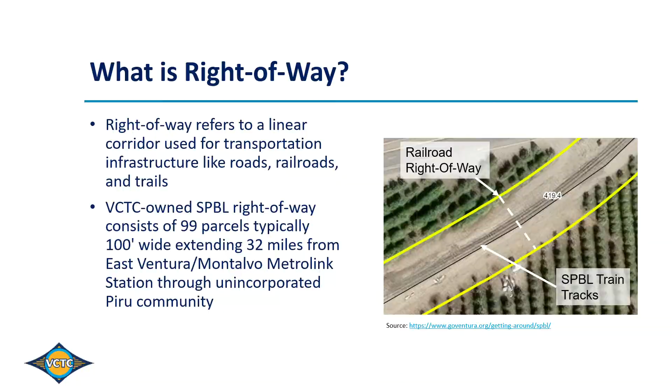In 2024, VCTC applied for and received a Surface Transportation Block Grant and also a Regional Early Action Planning Grant from the Southern California Association of Governments to update the Trail Master Plan from Saticoy to Piru. Then, following a competitive procurement process, our commission approved a contract with WSP in March of 2025 to prepare an update to the Trail Master Plan and environmental documents. I share this timeline and the details to convey that we're still on the front end of the Trail Master Plan update, with many opportunities, including this evening's presentation, to provide input into the planning process.

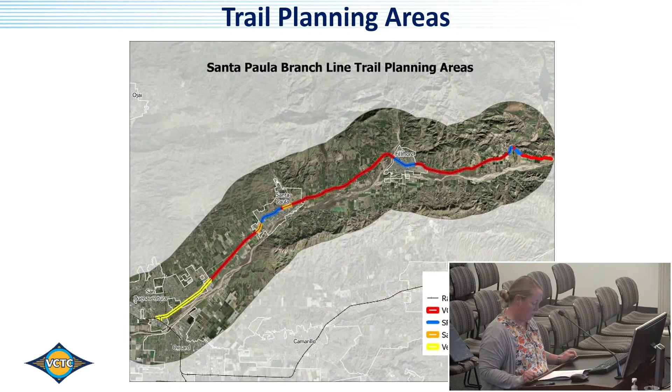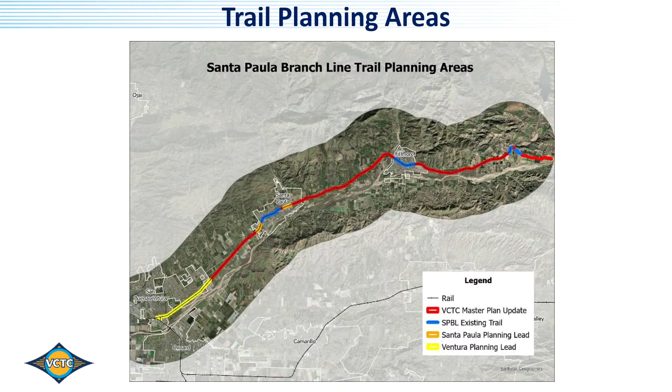This map depicts the various planning areas for the Santa Paula Branch Line corridor. The branch line begins at the East Ventura Montalvo Metrolink station and continues for approximately 32 miles through Santa Paula, Fillmore, and Piru. The existing completed trail segments are shown in blue. The area shown in yellow is the 4-mile Ventura segment, and the areas shown in orange are the Santa Paula extension segments. The red sections are the focus of the Trail Master Plan update, the approximately 27 miles from the Saticoy Depot through to the end of the corridor, which extends about 3 miles past the end of the existing railroad tracks in Piru. Areas that connect existing trail segments and the Heritage Valley communities with one another and eventually create connections to the coast.

As I mentioned, there's a 4-mile segment in Ventura that is advancing through the final design and construction through a separate effort led by the city of Ventura. So that part is not included as part of this Trail Master Plan update.

To complete the trail, we do face a number of challenges related to constraints on the right-of-way, bridges, and crossings, and addressing concerns related to compatibility with adjacent agricultural activities. As I like to say, if this project were easy, it would be done by now. At the same time, we have many opportunities to build on existing studies, connect to existing and planned trails, and to incorporate historic and educational elements into the trail design and implementation.

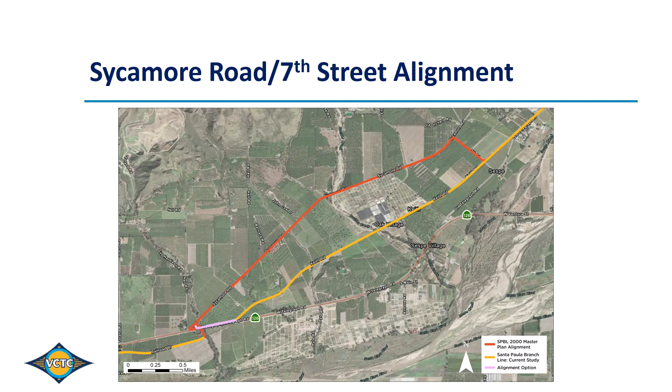We are looking at leaving the railroad right-of-way to cross the Sespe Creek and following Old Telegraph Road. We believe that there is sufficient width there to restripe and add a protected bike lane across the river on Old Telegraph Road, and then reconnect with the existing trail segment that begins there at Goodenough Road in the city of Fillmore.

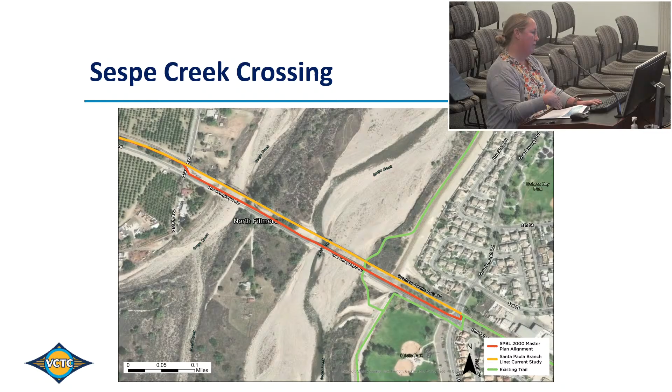That would be a significant cost savings compared to adding a new bridge within the railroad corridor, or adding a sort of cantilevered addition to the existing railroad bridge. So both the original 2000 master plan and our thinking going forward is looking at using Old Telegraph Road.

We've had some really wonderful, productive discussions with city staff to talk about some ways that we can leverage existing trails here in the city of Fillmore to both connect the trail segments across Fillmore, but also to create a really lovely trail network around the city of Fillmore by filling in a number of relatively small gaps in the existing bicycle and pedestrian infrastructure here in the city, taking advantage of a lot of the really great planning work that's already been done here in the city, and building additional segments out to create that connection across and through the city.

So those alignment options are shown in pink on this map. We are looking at a possible bridge over State Route 126 that would help connect across the railroad right-of-way. But we're also looking at some other alternatives for carrying pedestrians and bicyclists across the 126 and connecting with the city's infrastructure.

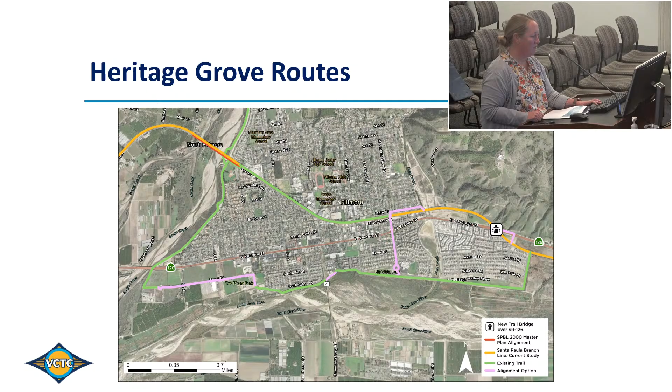So we are pursuing a programmatic environmental impact report that looks at the whole master plan, and we're really in the early stages of that environmental impact report process.

A programmatic EIR evaluates potential environmental impacts of a plan, program, or series of actions that can be characterized as one large project. It informs decision makers about the environmental impacts of an entire plan rather than one smaller project within a plan.

A programmatic EIR can accelerate environmental review of later activities by offering lead agencies the flexibility to consider alternatives and mitigation measures, to streamline approval of future projects and support implementation of capital improvements, and consider a broad policy alternative and mitigation earlier when there's more flexibility to address those concerns.

The environmental analysis process begins with a project description and public scoping, then technical studies, preparation of a draft EIR, public review and hearings, and a final EIR. We are currently at the public scoping phase.

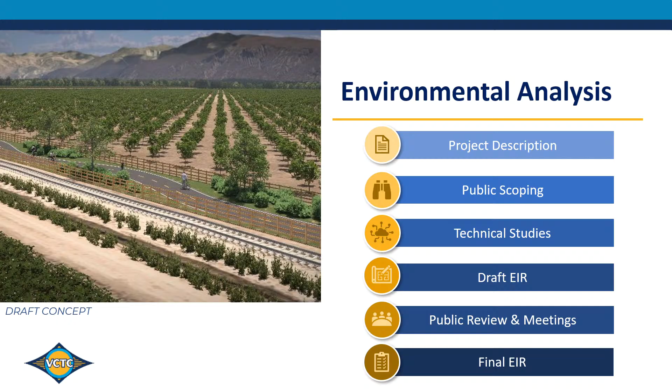A wide range of factors will be analyzed in the EIR, including agricultural, biological, and cultural resources, transportation, wildfire, and many others. So we are not limiting the scope of factors being analyzed in this EIR like some projects would. We are considering the full range of potential impacts.

The master plan update and environmental review provides many opportunities for the public to engage in the planning process. Community engagement conducted thus far includes the formation of technical and community advisory committees that are made up of a wide range of agency and stakeholder groups.

Our team has also conducted 4 pop-ups at community events, including one here in Fillmore over the summer, and more will be conducted in the coming months.

We've held one-on-one and small group listening sessions with many stakeholders, about 20 to date, and we're grateful for the time and insights provided by all of our project stakeholders who have participated thus far, and we look forward to hearing from more stakeholders throughout the process.

We've also created a number of online engagement opportunities, including an interactive pin map, a website, social media, radio, newspaper, and canvassing.

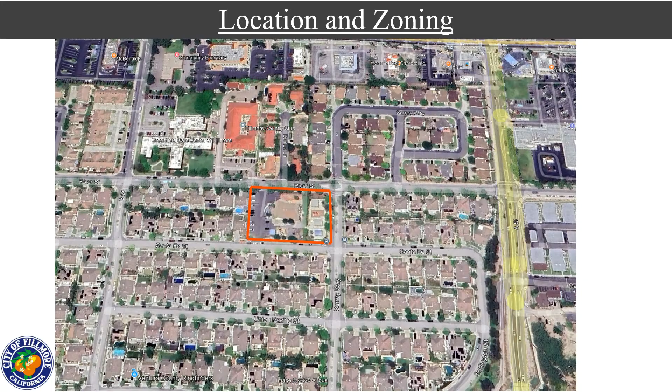The project is a remodel of an existing structure at 808 River. This is modification 2 from an existing conditional use permit for a child care facility, so it's an expansion involving development permit 1106, a conditional use permit, and a lot merger. The location is at the corner of River, Surrey, and Santa Fe to the south. The zoning is residential medium, which does allow for child care facilities. However, if you have more than 7 kids, you must get a conditional use permit, and that's what they're doing. It's an existing permit as well, so they have more than 7 already.

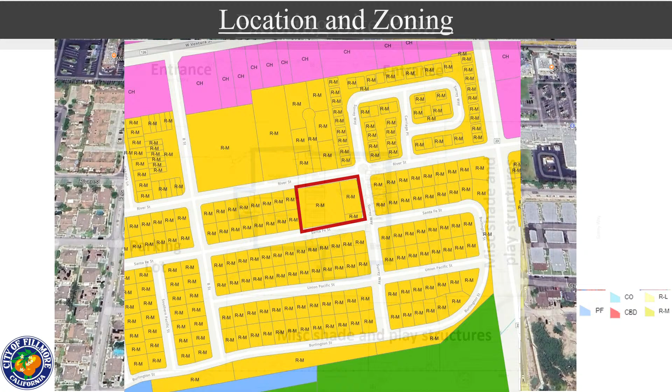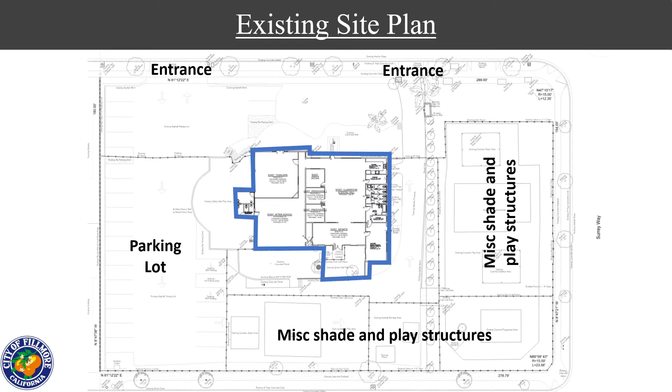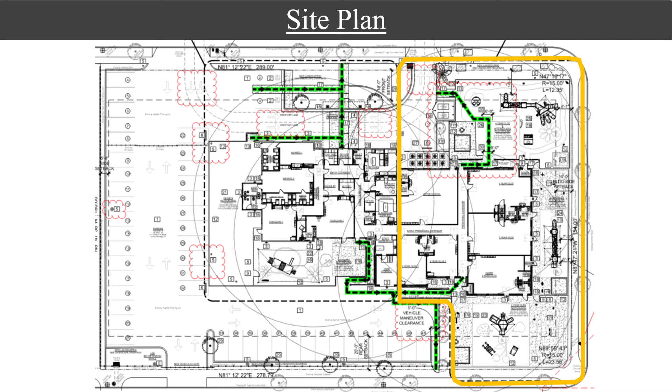This is the updated site plan. The project overall is to be done in 2 phases. Phase 1 is the expansion portion, so this is the new structures that will be added, adding over 6,300 square feet of classroom buildings, playgrounds, separate play structures, bike tracks, sandboxes, and the parking lot reconfiguration at the south entrance.

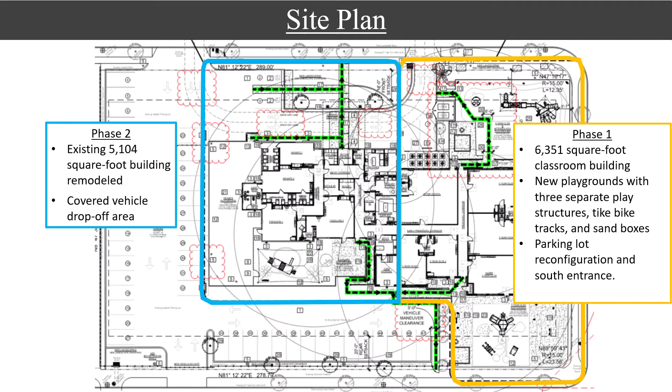Phase 2 will be the remodel of the existing facility. Once they move the kids out of the existing facility into the new one, then they can remodel the existing structure, a 5,100 square foot building, and it'll be adding a covered vehicle drop-off area. That'll be a new feature added, and that's the entrance at Santa Fe to the south.

Planning Commission's comments in October relative to landscaping asked for artificial turf in the front to be more of a natural landscape, and asked for the tree sizes that were 24-inch boxes to be increased to 48-inch boxes.

The applicant has addressed those in the front yard. They've converted the artificial grass to natural plantings, and the tree sizes were increased to 36-inch, between the 24 and the 48, for various reasons they provided. One was the planting space along the parkways, another was the success rate of trees at a smaller size and cost and various other factors, and they felt that a 36-inch box would be sufficient. 24 was all that was required per our code.

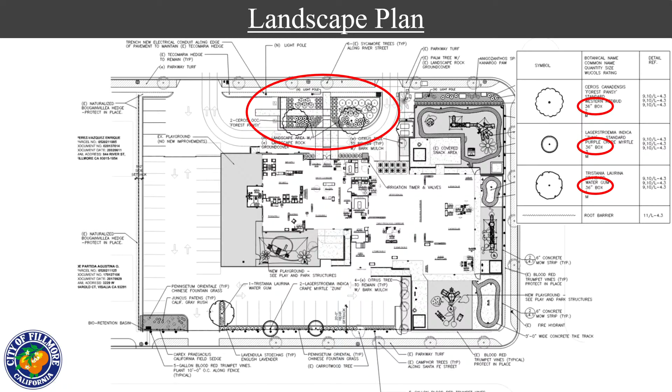Overall, the landscape plan comprises 3,800 square feet. It has front and rear yard setbacks that are planted, including trees, shrubs, ground cover. There's a detention area in the southwest portion that will be used to filter surface water runoff, as well as maintain landscaping. There's vines along the perimeter, along the existing vinyl fence, and the large perimeter trees, as I mentioned and showed in those photos, will be remaining.

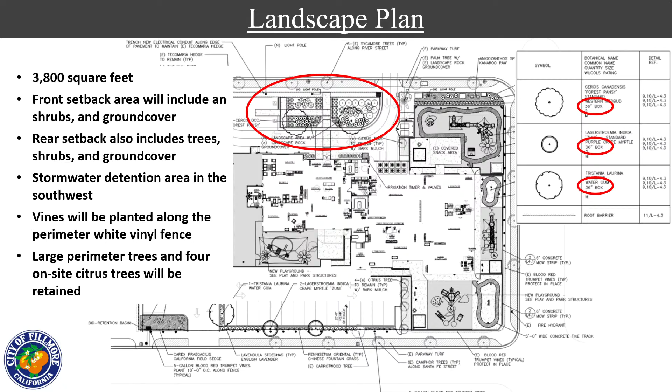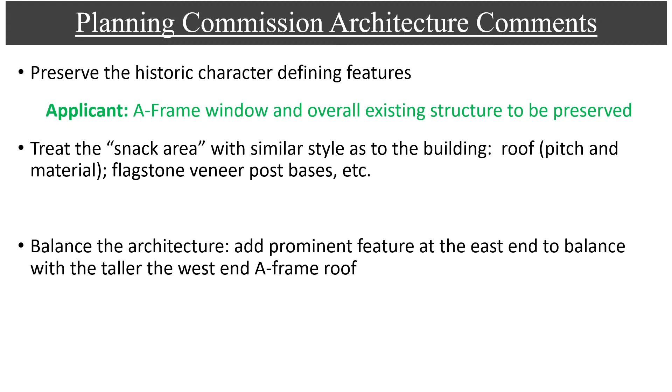The Planning Commission also had comments on the architecture, about 7 or 8 comments. One was to preserve the historic character, the defining features. The applicant has preserved that A-frame window on the north elevation, that's the old existing church dating back to the early 1970s. So they've decided to preserve that. They removed their sign from that structure, and that stained glass window will remain.

The commission asked that the snack area be treated in a way that architecturally matches some of the proposed features, including flagstone veneer at the posts and perhaps a pitched roof. The applicant suggested that would not be to their benefit, preferring to maintain the existing structure as is. They felt adding a stone veneer would add corners to the base - if you add a pilaster at the base of the posts, that would be a hazard for kids to bang their heads around the play area. It's also not visible from the public vantage point, as there is a vinyl fence across the front.

There may be various other reasons. The applicant's overall response was provided to you in a separate letter in your packets.

The Planning Commission asked that they balance the architecture and add a prominent feature to the east side, because you have the A-frame church feature on the west side, and the commission felt an architectural balance on the east side would be apropos. The applicant's architect addressed it by increasing the roof of the drop-off area, adding a pitch to that, which would be a similar style.

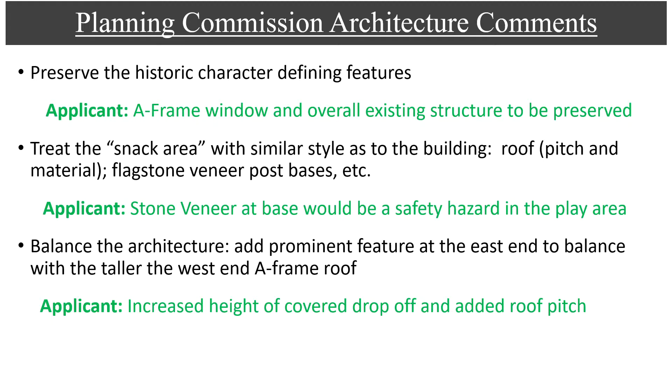So that covers the architectural feature there. The commission also asked that they add more transitions between the roofs of the existing and old and the new building. The architect sought to balance functionality and continuity with the existing structure and add waterproofing without adding new creases in the roof where rain could collect. They did add a roof plan that helps show a bit more about how the roofs are set back. We'll go to those after this.

The commission asked that lighting reflect more of a decorative character, or more Fillmore style character, something a little more ornate. They did address that, and changed the wall lights and the pole mounted parking lot lights to reflect a more decorative style. Those are shown in the packet, and I'll also show those here in the slides.

The commission asked that the applicant change the vinyl fence and consider an architectural mesh, as is shown at another location on site. The applicant felt the vinyl fence was more consistent with the existing fence in terms of providing privacy and maintenance. It was more beneficial to them to keep it as vinyl, so they're requesting to keep that as is.

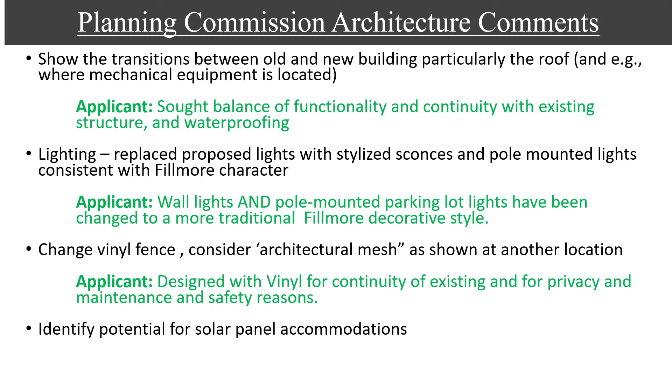They also felt there were some safety reasons to not have plants planted where the kids are playing. The commission asked that the applicant identify potential solar panel accommodations, so the architect went ahead and clouded areas on the roof pitches that would show availability for solar access.

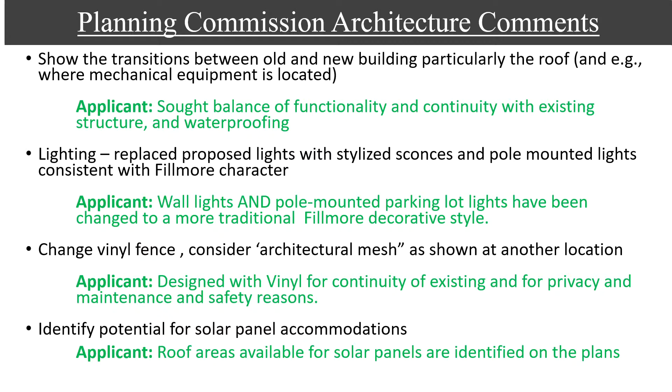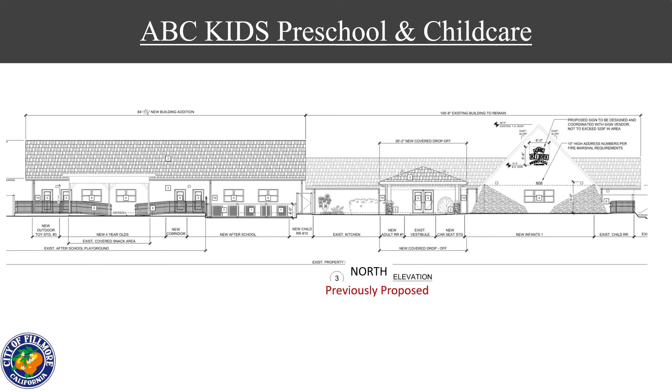This is the existing structure at the north elevation. This is what was previously proposed, where you can see the historic character was going to go away, and the sign would be above. You can see the more hipped roof there for the drop-off area. The new project maintains the historic church, pitches the roof over the drop-off area, and relocates the sign to that location.

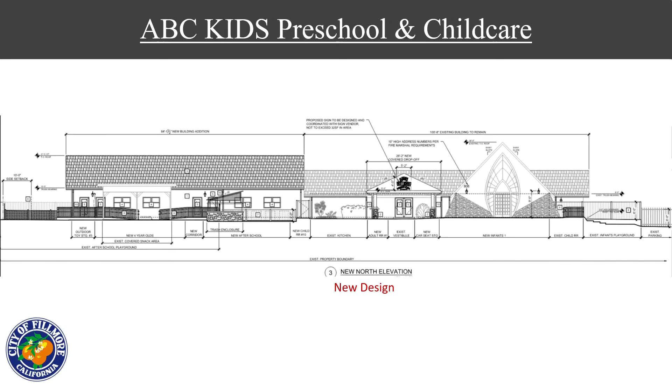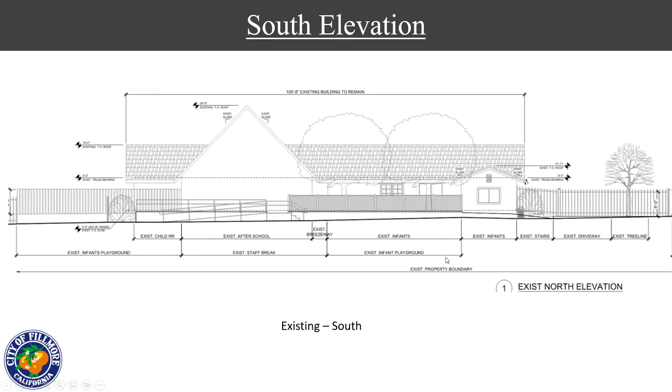This is the south elevation, existing, and that's proposed. What's clouded here are the decorative wall sconce lights. That's the change that they made.

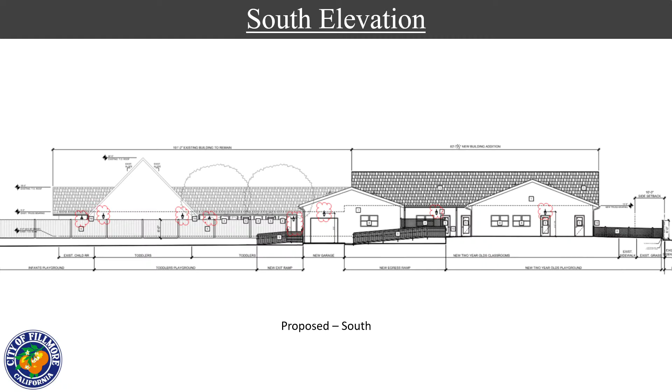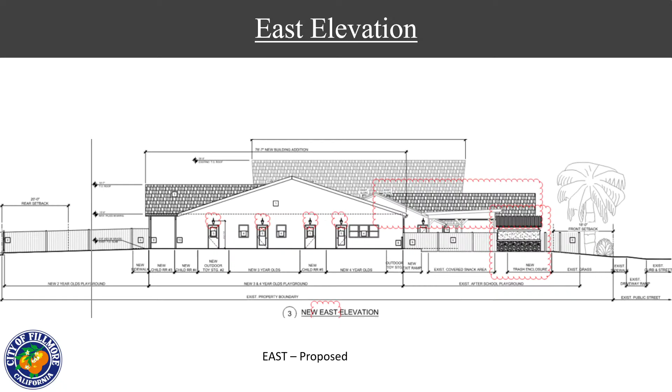This is the existing east elevation, and this is the proposed east elevation. It shows the different roof pitches, and it also shows the decorative wall lights.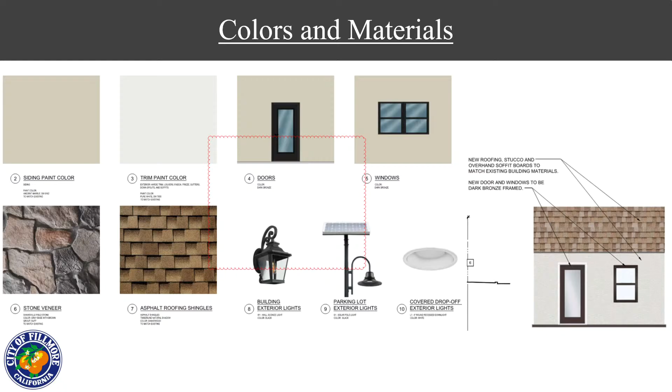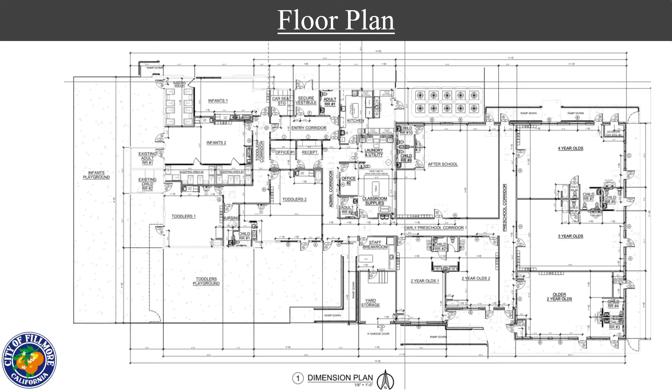And that's the floor plan, into the operations of the childcare facility. It would expand up to 160 students and 21 faculty and staff.

It adds parking, a drive aisle, and a south entrance, as we mentioned. Total parking stalls would increase from 25 to 47. We talked about ingress and egress on the north side on River Street, and on the south side a new driveway would be added. The north driveway would be for entrance only, and vehicles would loop through as they drop off, then loop straight back out to the other driveway, maintaining one flow of traffic, easier for safety.

Hours of operation overall are from 7 a.m. to 6 p.m., but within that time frame there are different schedules that happen in terms of kids' drop-offs and pickups.

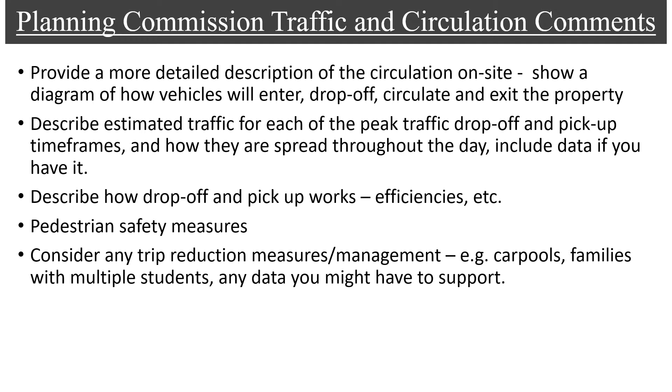The Planning Commission had comments on the traffic and circulation, summarized here. The top bullet point was to provide a more detailed description of the circulation on site, show a diagram of how drop-off and circulation works, describe the estimated traffic for each peak drop-off and pickup timeframe throughout the day, describe pedestrian safety measures, and consider any trip reduction measures or management the applicant may undertake in the project.

This is the site plan circulation. The blue arrows show how cars would enter as they drop off children. They would enter eastbound on River Street and loop through in two rows, so there's a lot of stacking distance there. As they enter the canopy, the kids could get out and enter the school, then the cars would proceed and make a right turn on River Street.

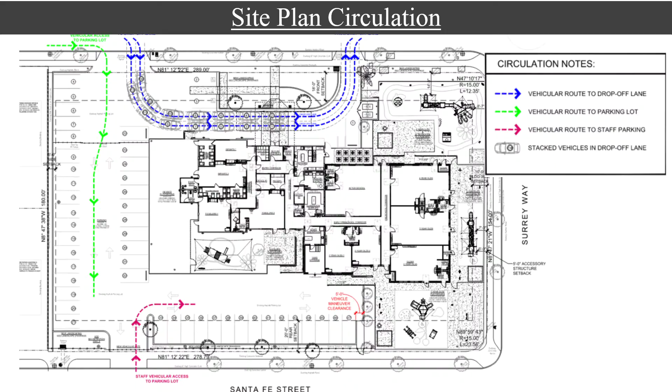Other pass-through parents who need to park short-term would have the ability to come through the driveway, as shown in the green arrow, and find a parking stall there, then walk in. Faculty and staff are designated to come in the south entrance on Santa Fe. This serves to break up the traffic coming and going at different driveways and streets, so it's not as congested as it would be if everyone used the existing driveways. The applicant also identified mitigating factors as part of their operations that help control the traffic, safety, and circulation.

Some of those factors they highlighted include that there are multiple children per family, so the 160 students are not necessarily 160 vehicles. It's often there's 2, 3, or maybe more if they're carpooling, kids getting out of the same car, so there's some efficiency there in terms of vehicle trips.

Many of the families are within walking distance, so they don't add to the traffic. They do stagger the drop-off and pickup times. The overall time frame is broken up into different segments. You have a 7 a.m. to 9 a.m. segment, and then you have a big pickup time at 11:45 midday, so that does not conflict with your typical commuter traffic.

And then you have a school-age program that's from 1 to 2 drop-off. That also does not compete with your normal commuter traffic. Midday traffic is not the same as the commuter traffic, so it should be pretty clear during those times. And then the afternoon pickup gets into a little bit more of your PM peak commuter traffic, but then it's kind of the residual kids who are still there who have the full day of childcare. So that's a smaller representative group, between 3 p.m. and 6 p.m.

Other items the applicant identified are staggered staff shifts, which coincide with some of these pickup and drop-off areas. You do have staff coming at 7 to 4, 8 to 5, and 9 to 6. So those 21 staff members are not all coming and going at the same time.

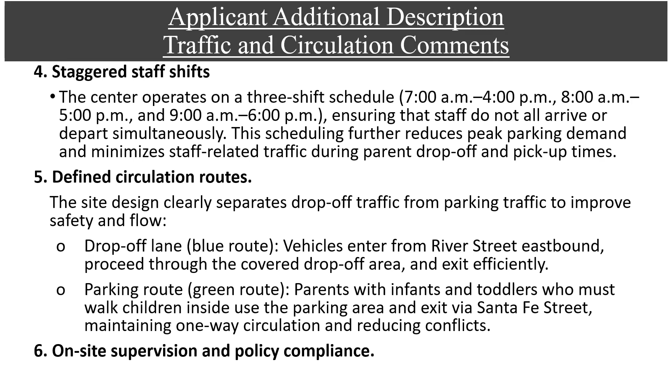So that goes over what the Planning Commission's comments were. Overall in planning, we evaluated the project for its consistency with the development standards, focusing on the municipal code. This is the same chart shown last time. It substantially complies with all of the design standards as required. It's got significant setbacks, meets parking, and is well below the height limitation of 35 feet, and it has sufficient landscaping.

Some of the landscaping and parking was grandfathered in. It had been non-conforming but legalized under previous permits, and that condition carried over to this permit as well.

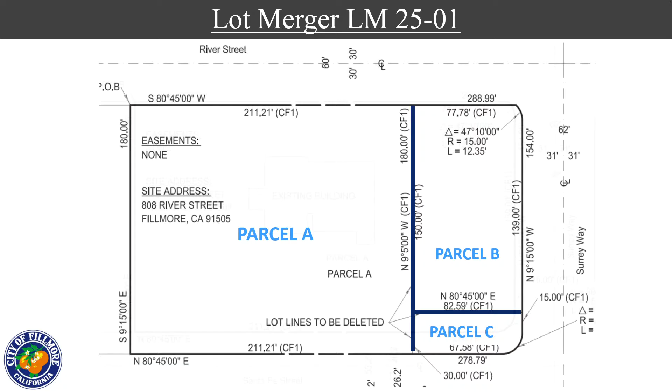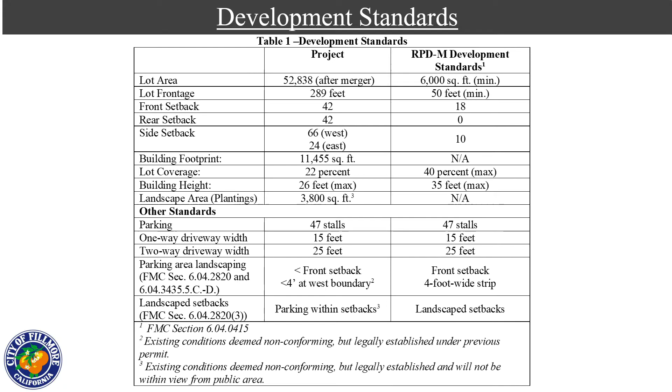Also, as part of the project is a lot merger. There are currently 3 lots, 3 tax parcels, all to be merged as part of the project, and this will be the finished lot size. The existing building will obviously be expanded, but that gives you an idea of what the lot size will look like. The lot area will be close to 53,000 square feet once all combined.

That concludes the overall project description. CEQA, the California Environmental Quality Act, is required to be reviewed for every project, and this project is considered exempt via various categorical exemptions: Class 1 as an existing facility with minor expansions under Section 15332, Class 32. It's an infill development, surrounded by urban uses, everything is accessible, and none of the exceptions to the exemptions occurred.

Staff's recommendation, since it meets all of the development design standards, is that the Planning Commission adopt Resolution 25-1061 approving the categorical exemption from CEQA and Modification 2 to the conditional use permit; adopt Resolution 25-1062 approving Modification 2 to the development permit for the construction; and adopt Resolution 25-1063 directing staff to process the lot merger to merge the 3 existing lots into 1.

I'm here to answer any questions, and the applicant is also here. I don't know if the applicant wants to do a presentation or just be here to answer questions. They'll answer questions. Perfect.

Did the applicant provide any kind of analysis prepared by a qualified historic preservation professional to determine how they can preserve and identify the historic features of the building? They didn't hire a professional. However, we consulted with the County Cultural Resources Heritage Board on features like this, and we followed their protocol for preserving, and they said this is exactly what they would do, what they would recommend.

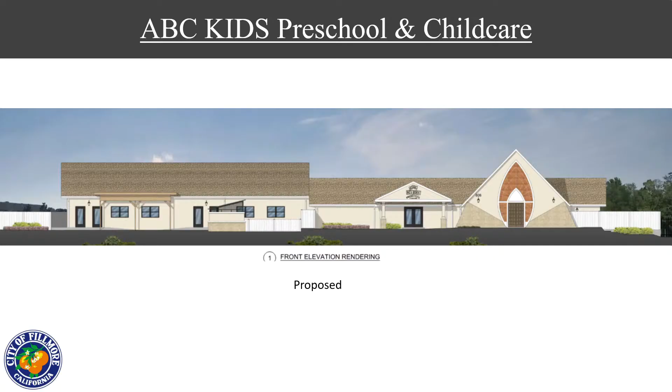I just think, like, you see how this building on the left totally... can we see the before elevation? Okay, so here's the building. Actually, Brian, I have some images that I sent to you, can I show one of them? Sure, thanks.